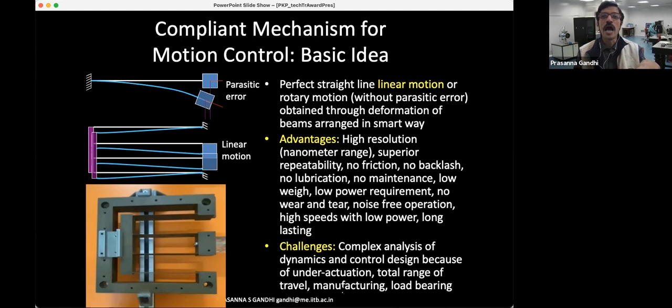The challenges these systems offer include the complex analysis of dynamics and control, due to the under-actuation involved, and the total range of travel, although larger than what is typically given by competitive piezo devices, is still limited to some extent. There are also some manufacturing challenges that we have overcome during the research.

The rotary counterpart of this is designed here. This was developed for an ICMR project for a cooperative eye surgery robot. A tool goes into the eye from a single point, a hole made in the eye, and the tool has to obey the condition that the point of insertion cannot change. It has to rotate or do all its movement about that point, and this is obtained by such a compliant mechanism with very high accuracy positioning inside the eye for very critical surgeries.

Although this was developed for eye surgery, it has many different applications, which I'll touch upon later. These are the main advantages this rotary motion mechanism also carries, and there are several variants of these that have been researched, analyzed, and further developed for systems.

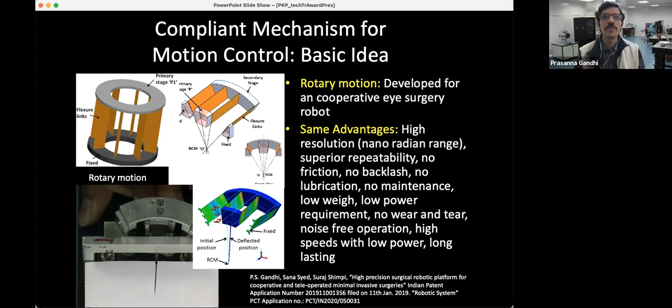The next part required is analysis. We won't get into mathematical details, but we developed something called the Chained Constraint Beam Modeling, CBCM, which is a highly efficient numerical technique to model such mechanisms. It can do optimization of these mechanisms very easily, rather than going for an FEM approach which needs a lot of computational power. Control development was another deep research topic in this area.

I'll show you some glimpses of control development that has been done for similar kinds of systems. These control algorithms are now going into actual systems deployed in some of the devices we'll talk about. Another thing done was addressing the manufacturing of these mechanisms, which is typically by assembly, a way that was not there in the literature.

We found that if we do the normal way of mechanical assembly, these mechanisms turn into a warped kind of mechanism. So we got into this problem and designed guidelines for assembly such that, without changing the tolerances required on the linkages and machining—which would involve cost—we can follow these assembly guidelines and get a warp-free mechanism that functions.

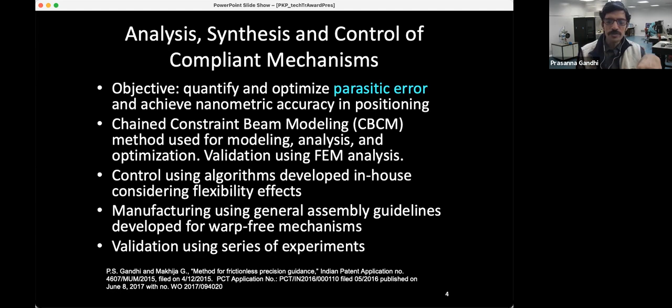This gave a way to fabricate three-dimensional mechanisms. Otherwise, you would need tools like EDM cutting or water jet machining, which typically give you two-dimensional mechanisms only. So this was a very important step in the process, and of course we validated it with a series of experiments and products.

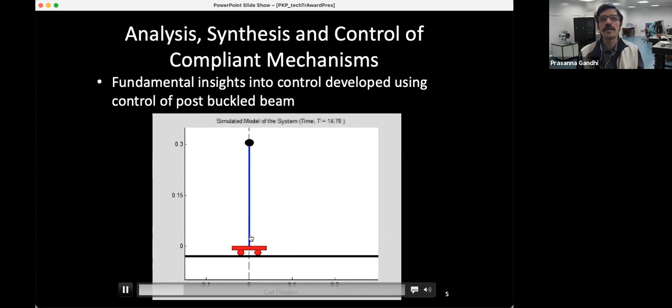This gives you some glimpses about some of the controls that were developed, particularly for a much more complicated system called a post-buckled system. Here the beam is actually in a buckled position, as you see, and this mass is more than the first buckling mode weight this beam can take. With this control strategy, which involves motion of this cart, the beam's unstable equilibrium at this position is stabilized, and this control is implemented in the experiments as you can see here.

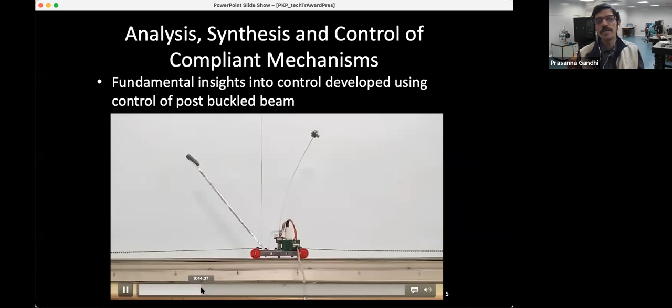It's quite an involved energy-shaping control strategy, where the energy of the closed-loop system is defined, and for that defined energy a control algorithm is developed. In the experiment, using just the first mode modeling for this beam, the control development stabilizes the beam even though higher modes exist, and it is verified for disturbance rejection as well.

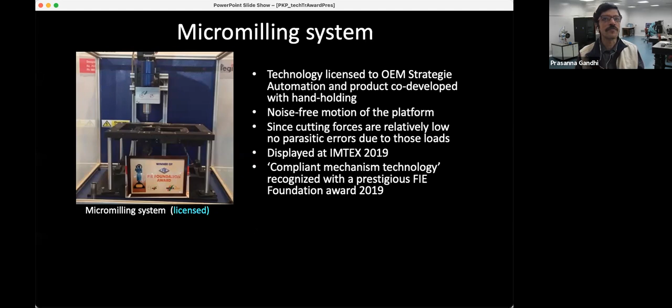Since cutting forces here are relatively low, the parasitic errors caused by forces that are not incorporated in our optimization don't matter too much here. This was displayed at the IMTEX exhibition, where it was recognized with the FIE Foundation Award. Some of the components milled from this system have a dimension of about 0.5 millimeters, 500 microns.

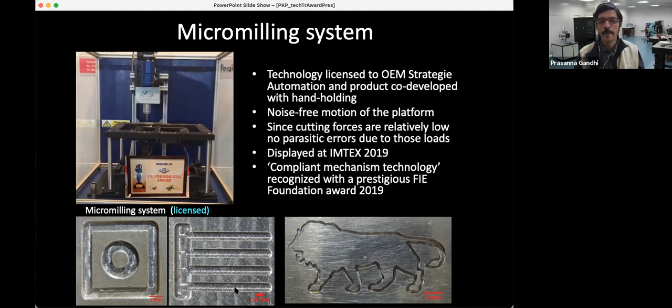So this is another system that was developed and licensed to one of the OEMs. The complete system is based on compliant mechanism motion stages, with an additional scanning algorithm or scanning strategy developed in-house, which is patented, and it was implemented into this process along with the compliant mechanism based motion stages.

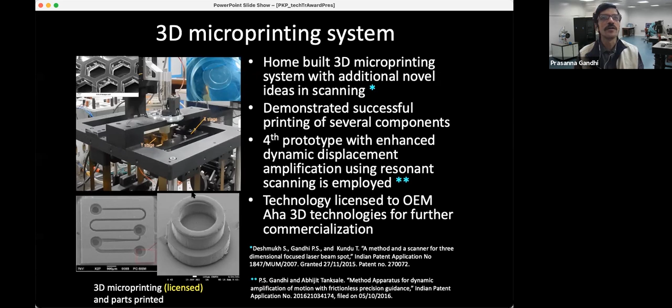That could produce micro and nano scale components, typically with nano positioning accuracy of the positioning of the lens and mirror systems, which will position the laser accurately to get very accurate features. And this is a video of this process happening.

We use a single line size here, done line by line and layer by layer. The single line size used here is about 6 microns in width, and it is positioned with an accuracy of about 100 nanometers over the entire range of this scanning.

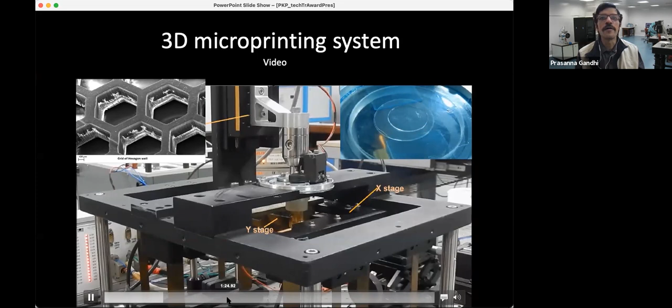You can see that this component is getting slowly developed here. This component has this kind of shape, with these features in it, and you can see it getting developed. I'll fast forward to show you that this complete component can be developed over a relatively large range.

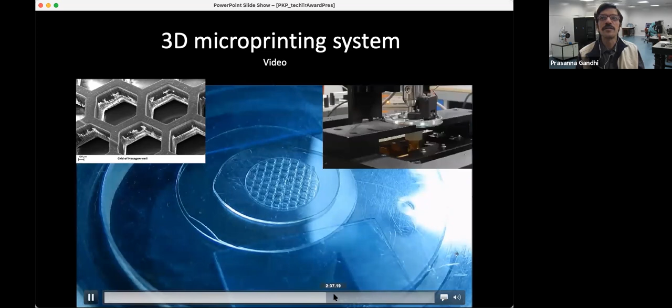For the Z dimension, for multiple layers, you will have this Z stage moving system. After every layer is done, the Z stage will shift and give you the third, Z kind of direction motion. This is the motion happening here.

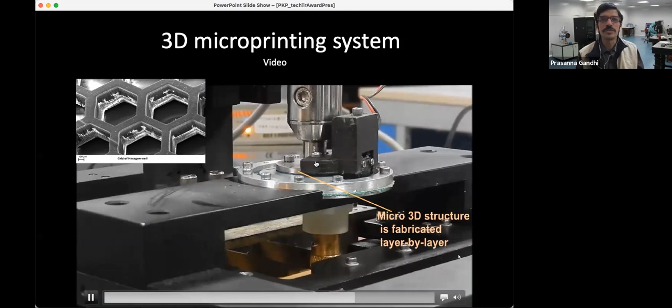Okay, so this is another kind of system that is developed.

We realized that Indian industry's pace of absorption of these technologies is a little slower than expected. As compared to software products, this is a hardware product, so people have to be convinced. Unless they see some stuff, or it is given to them on a platter, it is very difficult to absorb in the Indian industrial scenario. So we realized this, and we decided we'll help them with provision of the stages through a startup.

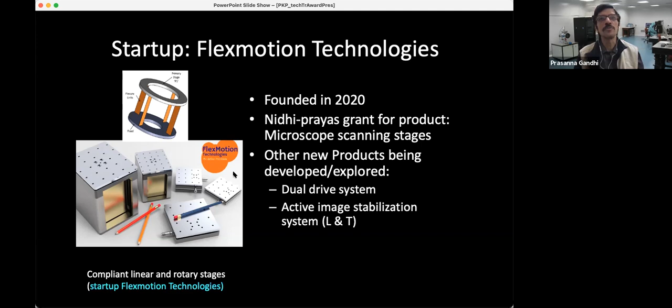And that's what led us to found this company in 2020, just recently. There are some products being developed now from this company, and we feel this will feed this basic technology into many different applications, several of which are currently being looked at.

These are now more like research, so to say, but having a lot of product potential eventually - areas where this has not been licensed to industry for now, but it is in the process, I would say.

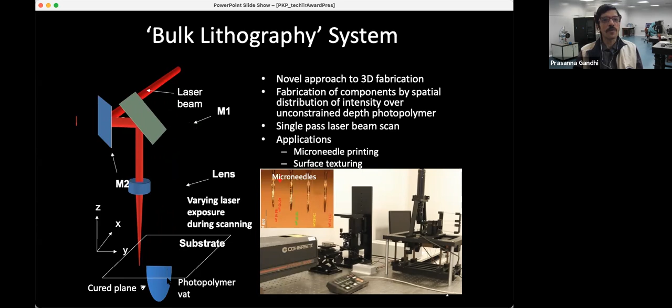If you scan this instead of putting it at one single point, we get this kind of layer that can be formed, and we can now control the spatial distribution of the light over the substrate in x and y direction. That distribution controls what is getting formed below - instead of a needle, you may now have whatever shape you'd like to produce, which can produce lens-like structures, cylindrical lenses, and that kind of structure.

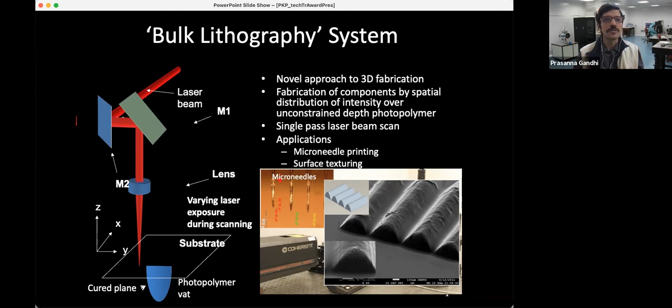This process can have two applications, which is a very unique kind of application - microneedle printing, where you'll have a very low cost system that can produce these microneedles in a simple, standalone machine. Otherwise, you need some kind of VLSI fab base, or other micro machining facilities, which are two-photon based or things like that.

The next application we have developed is powered by these compliant mechanism stages. These are especially helpful because we can go at very low speed since there is no friction. Typically, with friction, achieving very low speed is difficult because of stick-slip phenomena. Moving at extremely slow speed with friction is very difficult, and that is eased out by these compliant mechanism based systems.

And that can fabricate now this Hele-Shaw cell. This process is where you take a fluid and compress it between two plates, a top plate and a bottom plate. You press the fluid drop into these two plates so it becomes like a film, a thin film squeezed between the two plates, and then you separate these plates out. The air starts rushing from the side, but the fluid doesn't allow that air to rush so fast that it can become a small drop again.

So what happens is the air punctures the fluid interface at multiple places, which is called Saffman-Taylor instability. With that, you are left with some kind of fractal geometry structures on the surface. Normally these structures are completely random in nature, every time you do the process you don't get repeatable structures, that's why it's called instability. But the way we have done it is some kind of control of this process such that you get very neat array structures, or completely controlled Cayley tree kind of structures.

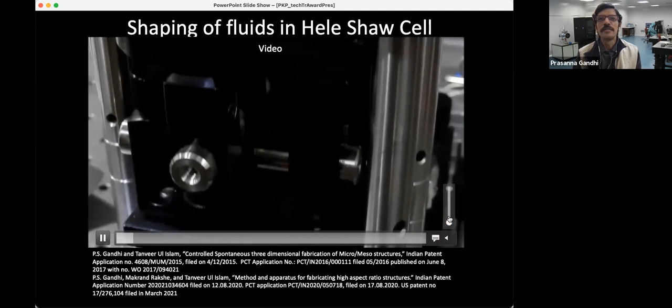So this gives you some kind of a glimpse of the way the process happens here. These are home-built setups here.

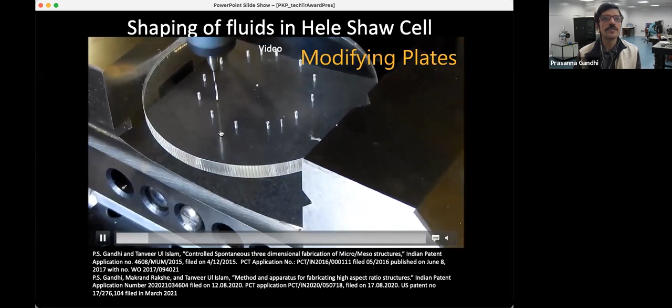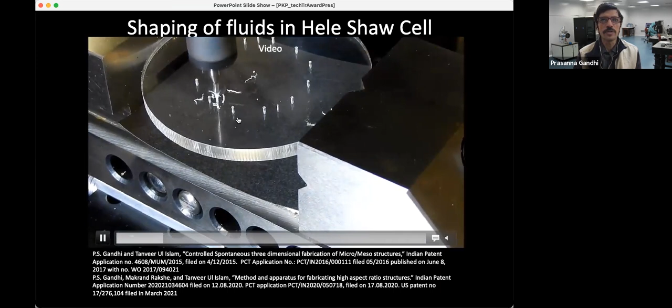We start off this process by creating these kinds of holes or anisotropies on the cell plates, which will be used for compressing the fluid. These special kind of features are put to get whatever desired patterns you would like to produce finally, by using this control.

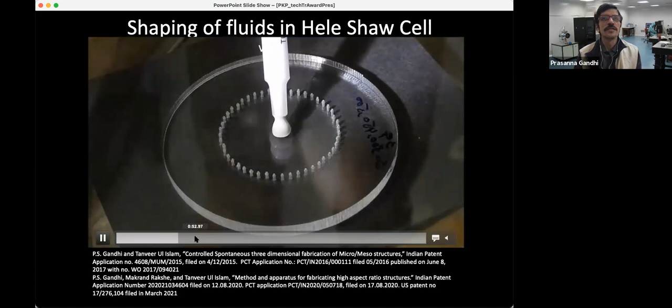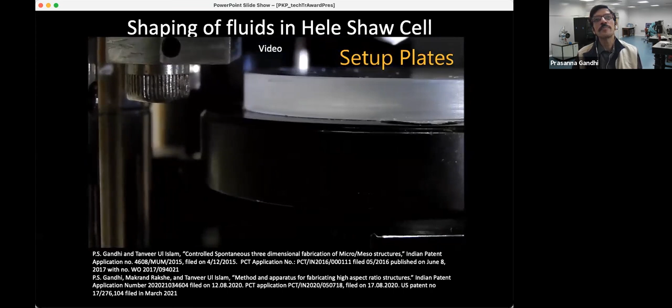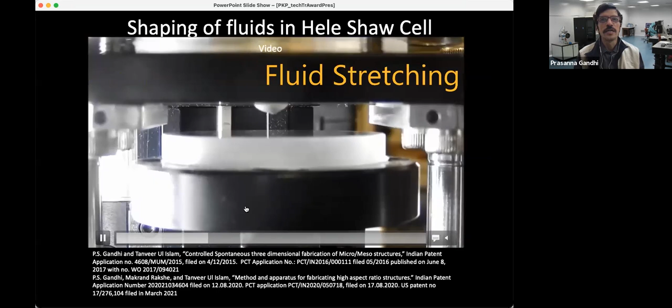And this is like a fluid that is laid on the surface. This metered quantity of fluid will be placed, and then you start compressing this fluid between the two plates. This entire setup and system has been developed in-house for this process. And after compression, you can see this fluid drop getting stretched into the film, and this is a top view.

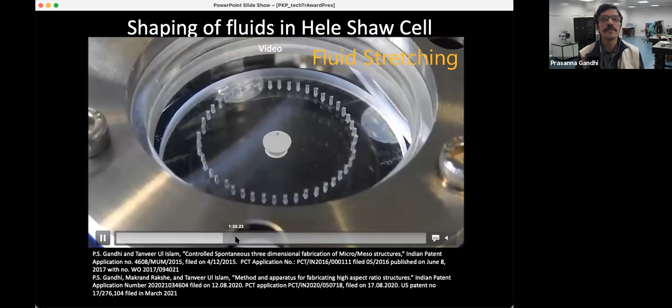And then when you do it randomly, you get these kinds of random structures. But if you do it with this control, with the holes, then you get structures which are now very controlled geometry structures. This process we have started right now, developing several applications upon it.

One of the applications in advanced progress is about drug discovery or drug delivery, drug testing kind of application or delivery. So this is the fractal geometry structures, and this is where the compliant kind of mechanism is there for the separation of the plates.

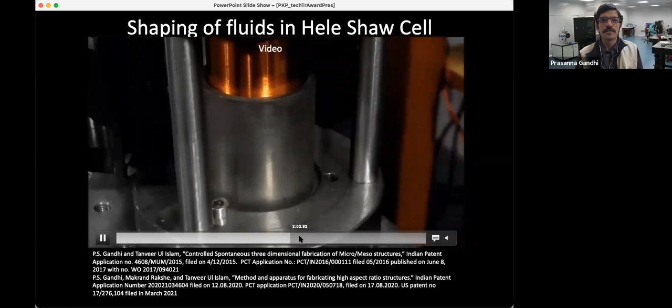So just to give you a final summary of the impact, the technology has been licensed to 2 companies, and a startup has been founded, which is now taking up a lot of this, forming a bridge between the Indian OEMs and this technology, feeding into different products, available to Indian industry and defense sector and things like that. So enhanced productivity and lower cost is what is the basis for this technology.